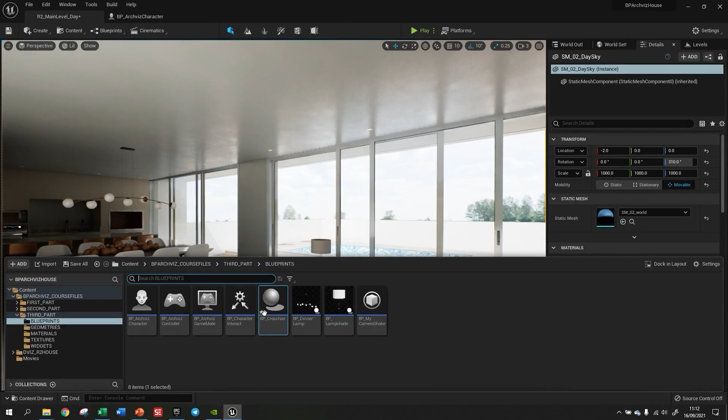So we've already looked at that, and now we'll have the opportunity to enhance it. Now I've already added these features in that we looked at in the previous class, just to speed things up a little bit. I've created the character interaction just the same way that we did in the lesson before. So now I've included the interaction, that's all done. Let me press play so you can see it.

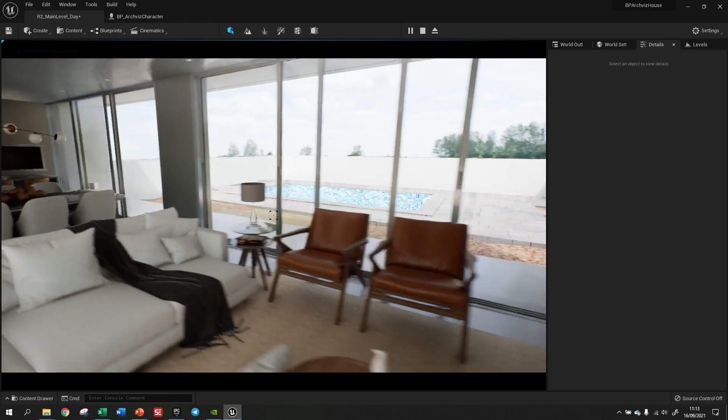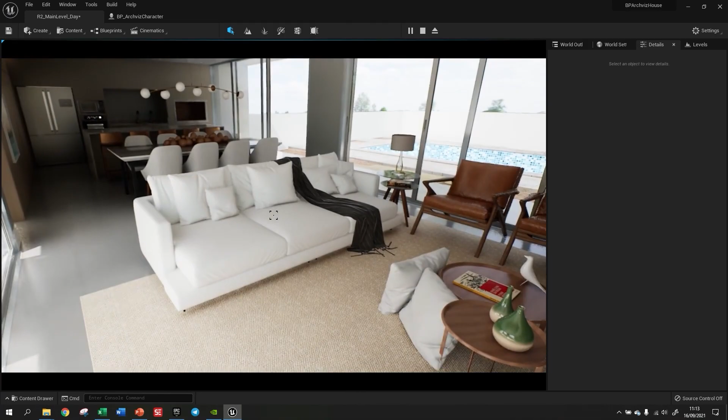I've also added here a crosshair too, and when we get to the class on widgets, we're going to show you exactly how this crosshair is made. So don't worry about it for now. I just thought it's helpful for us to put it in at this stage, just so we can see where we're pointing. But how we made it, we'll definitely go into doing that. I just didn't want to discuss that now and confuse everything, especially with the direction we're progressing in the course. So we'll definitely come back to how to do that. Key thing here is when you're pointing at objects, you can use the crosshair to make sure you're actually pointing at the right object. We'll look at that later on.

So first things first, let's work with our lampshade. It's important to remember that for every blueprint, you want to have this interaction attached, and you also need to have a collision. Just like in the autofocus lessons, the object mesh must have a collision too, because it must be hit so that the object's detected. So it's important to have that collision set up. Sometimes everything is working and one specific blueprint isn't, so just check the collision first, because that can be a simple detail that will make it a lot easier for us to find what the error is.

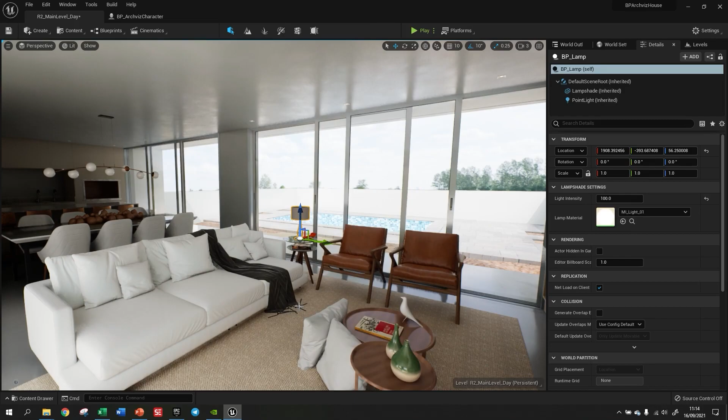All right, we'll be working with the lampshade first then. We need to open the blueprint. One interesting thing is that in case you have several different blueprints, you might start to get lost within your scene. If you need to open a blueprint that you clicked on, you can come to World Outliner and you can see it listed there. To the right, it says edit BP, so I can click on that and I'll be able to edit the blueprint.

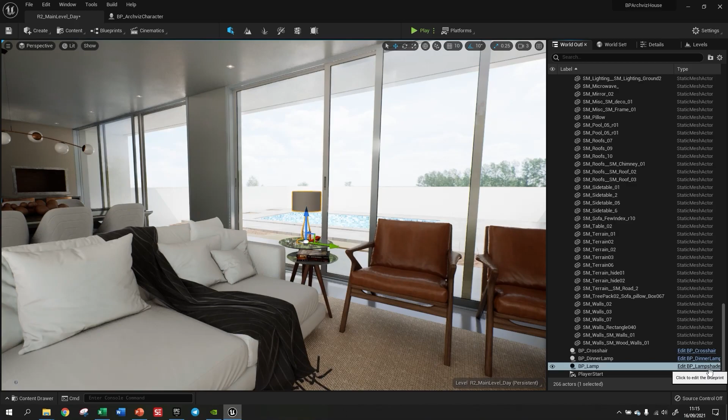Now, another way you can do this - I believe it's still in Unreal Engine 5, it's there in version 4 too. So in Engine 5, you can click here as well, but also up here under the details panel, this little button allows you to - you see it says open blueprint editor? It allows you to open the editor in just the same way.

So now that we're in our blueprint, just like we did in our previous class, we were using the F key here, weren't we? Now we won't be needing that anymore, and we won't be needing the enable input anymore because we don't have the keyboard interaction anymore. So we can just delete that, and we'll interact through the blueprint interface through our character instead.

So first thing we need to do in this blueprint, since it's a receiver, it should also have the same implemented interface, the same Wi-Fi connection, so to speak, from the sender. In this case, our sender is the first person, our blueprint Archviz character, which I've already implemented here. So that's going to do that function, but we need to also implement this to the other blueprint too. So let's go to class settings and we'll add a BP character interact, which is our interface, and compile and save just so it can register everything. And now all you have to do is create an event - I'll create an interaction event, or event interact.

Okay, this one here, event interact. Please notice that it has been given this little icon here for blueprint interface. So now at least we know it's going to be linked.

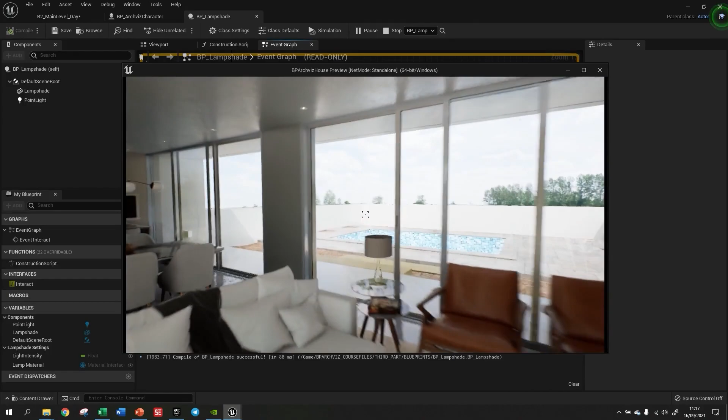We connect that to our flip-flop, so it should be active now. Let's come a little bit closer. Now we point to the light and click, and the lights are on. See that? Working perfectly now.

So it's detected it straight away, especially with the crosshair. It's a lot easier for us to aim at the object we want. And our line trace is doing that through the crosshair too, pointing right in the center of the screen.

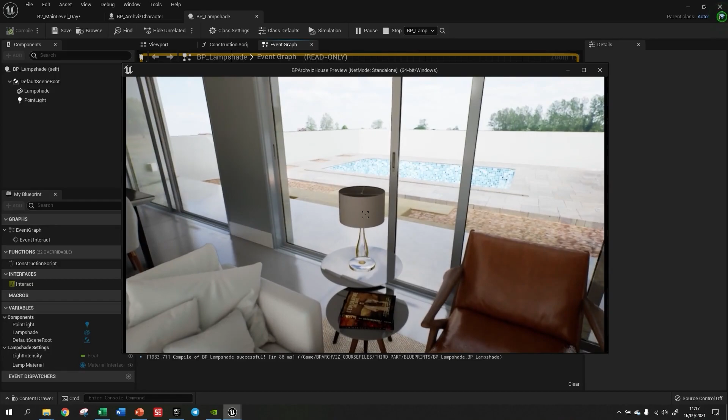Cool. So as I click, it turns on and it turns off when I click again. It's important to get all that set up that way, but it's quite useful for us to be able to click rather than use a keyboard function.

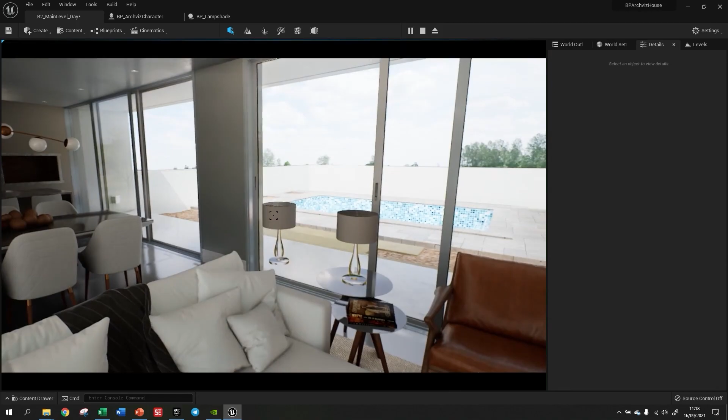Thinking back to the blueprint actor and the class topic, if I copy this blueprint, now I've got another actor, haven't I? I've got BP lamp 2. So if I push play, notice now that in the scene, it works perfectly since I applied the same setup.

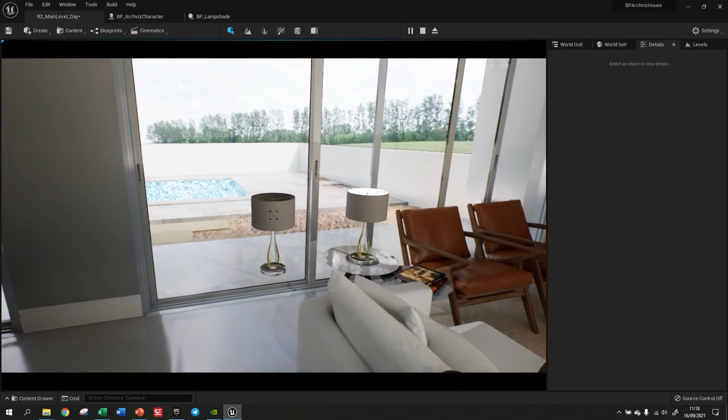So because of the way this is set up, you can just copy the blueprint. You just need to do one and then copy it and put it wherever you want in the scene, and it will detect it and turn it on and off, no matter where the actor is. I'm sure you can see the benefit of doing it that way.

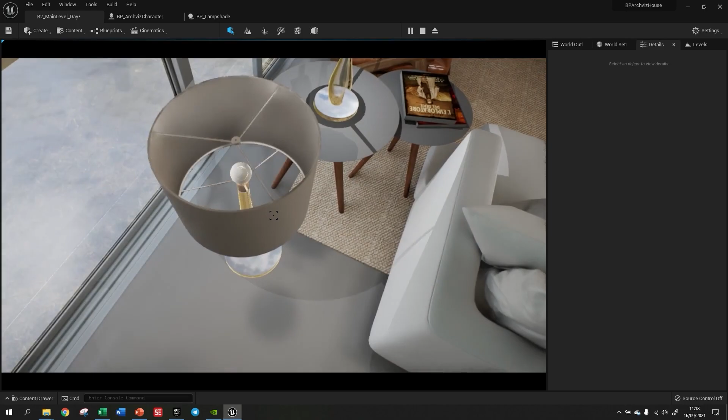Looking good, isn't it? Nice. So it's a really useful method, this, recognizing the message that we're sending to it, and then it's performing that action. It actually looks really cool, that slight adjustment in lighting when it turns off.

So that's a really simple blueprint to put in your arsenal of skills. Let's move on a little bit further. Let's do the same thing then with the chandelier. Now we've got to grips with how to do it with our lampshade. Let's go over to our chandelier now.

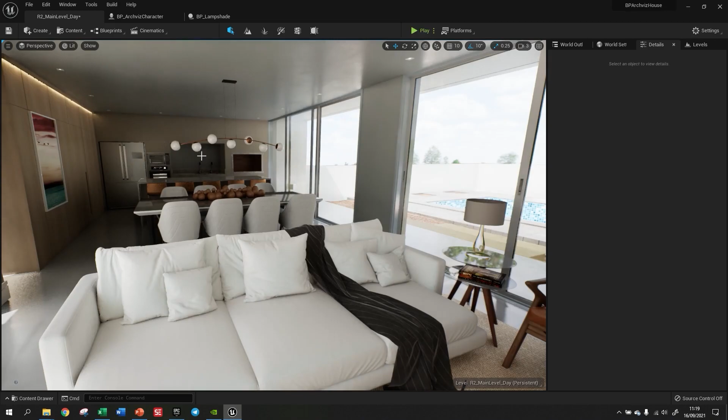I'll open up the blueprint. Let's do it this way. Open blueprint editor. So you can see how we've got the light set up already made.

We don't need this, do we? We can delete that, and we can delete enable input, and go to class settings and make sure we've got our interface, BP character interface, connected. And like I said before, it's just like connecting to the same Wi-Fi, speaking the same language.

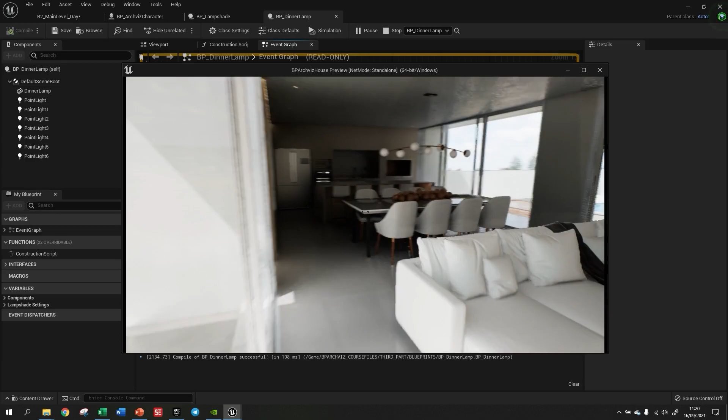And now I need to add the function, the interaction event, which is this one here, and plug it into the flip-flop, compile and save. And now we have our blueprint for a chandelier. Let's test it out. So we aim at it and click, turns on.

Awesome. See how much easier it is to create it through interactions now, right? It all depends on the character there, doesn't it? It's making sure we got the character all set up properly. And this is a great way to interact within ArchViz scenes.

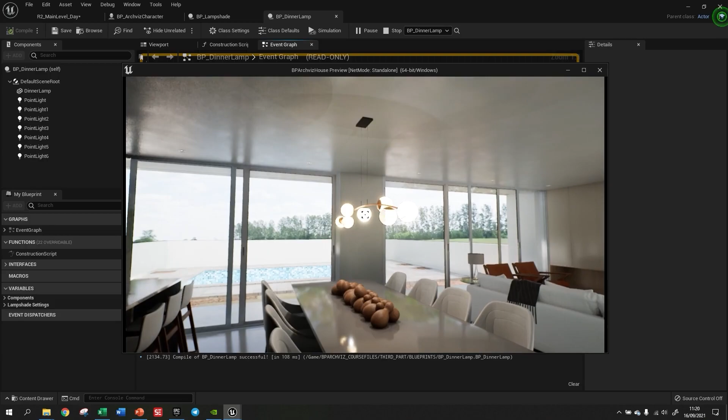Hopefully you can see how else you can use this within your projects. And of course, we'll explore other ways in which we can include this later on. So in the next chapter, in the next couple of classes, we'll continue with our understanding of blueprints and how we can use them in ArchViz.

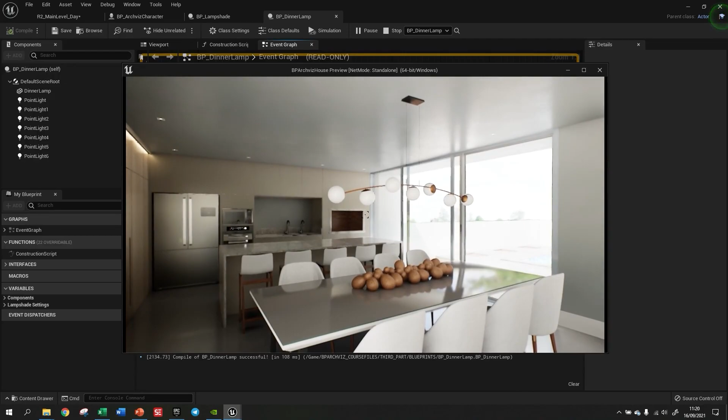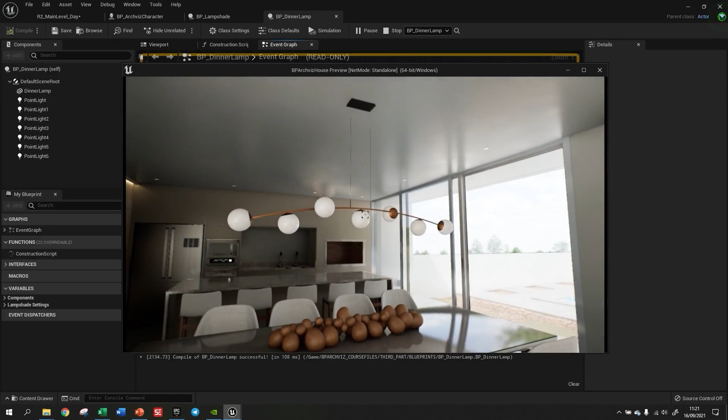We'll continue to use our interface as well. So we only need to add the interface to the blueprint, add the event, and make sure each blueprint's connected in the right way and set up, okay? But feel free to test this, what we're showing you here, to explore how else you could implement it.

Because obviously we're just looking at lighting in this stage. The same principle can be applied in many other use cases. And yeah, so I hope this has been helpful for you. So that's it then. This is what we had planned for this class.